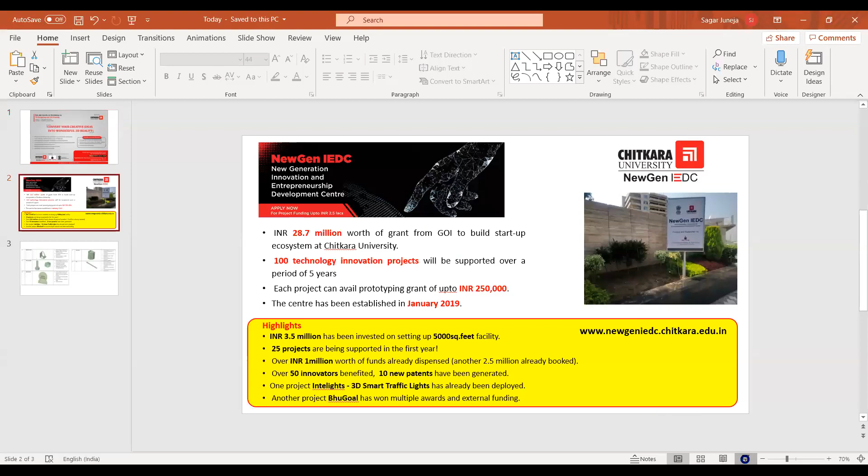So this is a quick slide on the center which I was talking about. It is called New Generation Innovation and Entrepreneurship Development Center, under which we have received a grant of 2.87 crore from Government of India to support these many projects.

So this is a center which is driving this particular workshop initiative. We have already supported 25 projects in this center. This center was given to us last year only, in January 2019. And a lot of our projects have won funding from different government agencies.

And then there are some projects which have won various competitions and all those things. So we are doing quite good as far as our center is concerned. If you are interested in more details, you can always visit this website and see for yourself what we are doing in the center.

Recently, during the lockdown period, I would like to share with you, we organized this competition called Innovate Plus, where we invited ideas from all over India for finding solutions to COVID-19 problems. And then we supported 4 of those projects from NewGen IEDC funding.

And we gave each one of them 2.5 lakh to build the solution. So we got these ideas from all over India. This is the kind of initiative we are driving in this particular center.

So as far as this workshop is concerned, these are the 5 different products, I would say, that we are going to learn to design in this workshop. All of them are practically usable products.

Like the first one is a mobile stand, then you have a nut and bolt, and the idea of including this nut bolt is that you should learn how to do threading and all kinds of things. And all other things you can easily relate that everything you are seeing here is of practical utility.

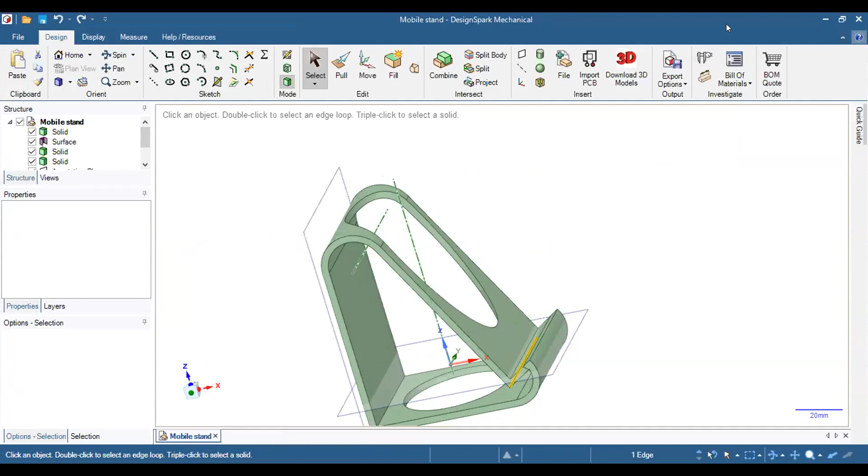How we can rotate this design by clicking, I have already told you. The spin action can be done by pressing the middle mouse button like this way, you can rotate your design in 360 degrees anywhere you want. If you are not comfortable with the middle mouse button, you can click in the orient section. You can see over here, by clicking the spin button, the spin command is on, and you have to click the left mouse button, and you can rotate it into 360 degrees.

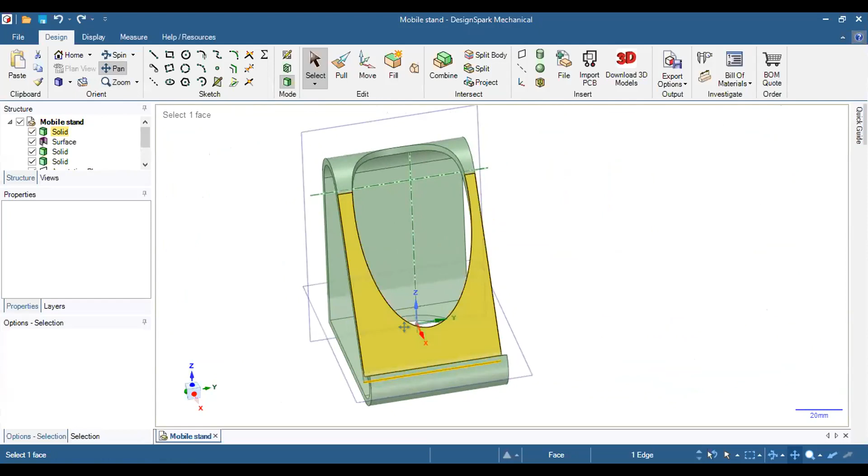Now the next one is the pan. If you want to move that object from here to here, like this way, you have to select that option and click the left mouse button, and you can move or pan this object into the screen. Once you are done with the panning, you can deselect this option by clicking into the blank environment, and the option will get disabled.

There's a different orientation views over here. These options only work when there is some design, like this one already designed, so you can see these options are enabled. The first one is the isometric view, you can see all three sides of the design in an isometric view. If you want to see a top view of the design, you can see the top view like this way. If you want to go to the bottom, there's a bottom view of the object that will appear, and same for left, right, front, back. You can rotate and see the specific view of your designed object in particular.

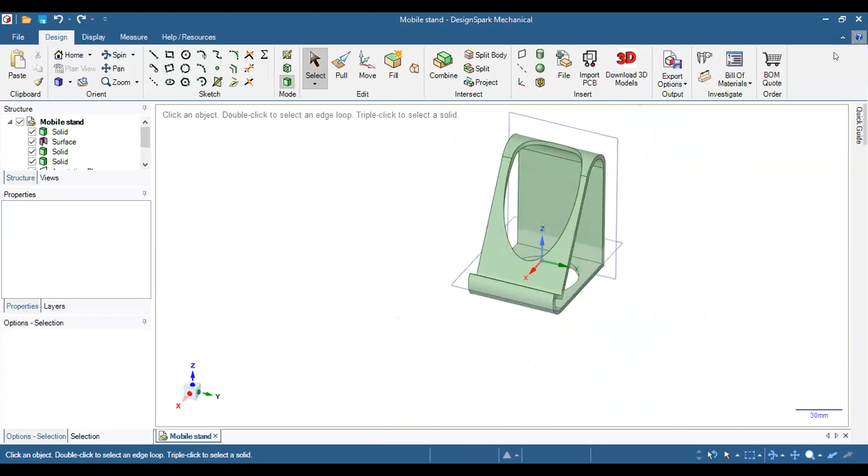Moving further, let me close this design because I just want to explain a few things in sketch and edit mode. I'm just closing this design like this way, clicking the cross on the page, going to the file menu, and inserting a new design. Once you have clicked on the design, you can see there's a design one page open, and see the working environment in the three coordinate system, Y, Z, and X system.

Once you have inserted the design, you have to rename it, and I must suggest that you must rename your design in order to keep things organized. This one is a test model. Test.

Once you have put the display name as a Test, you can see that it will be renamed automatically. So whatever you want to design, you have to design into this coordinate system.

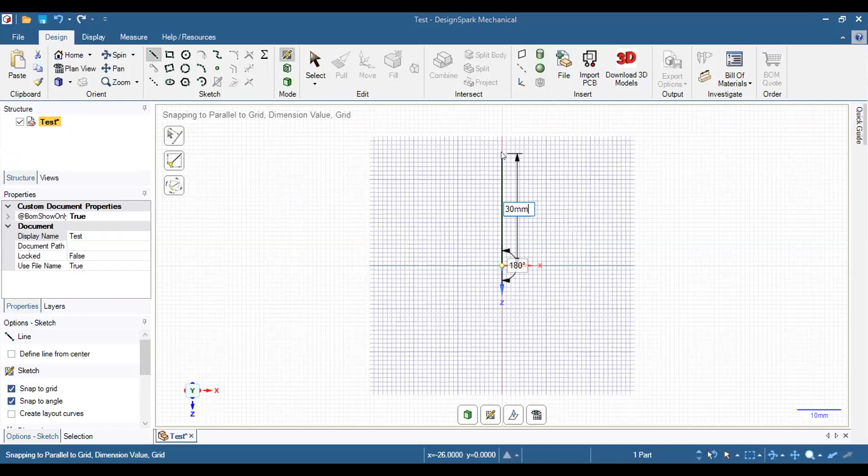Let us say it should be 30 mm. Once you fill your dimension into the box, you have to press the enter button, and you will see the dimension will be given. Because now the line is already selected, the next line will start from the same point.

Draw that line into the X direction, you can see another dialog box is opened, and you have to press again the spacebar, and put the dimension again for 30 mm, then enter. Same in this direction again, into the negative direction of the Z, and it's already showing 30 mm. If you want to put it again, you also can, otherwise you can press enter.

Now this sketch will be closed once this line connects to the start point of the first line, and once the dimension is filled, press enter. Now the rectangle, the square, has been completed by using line mode.

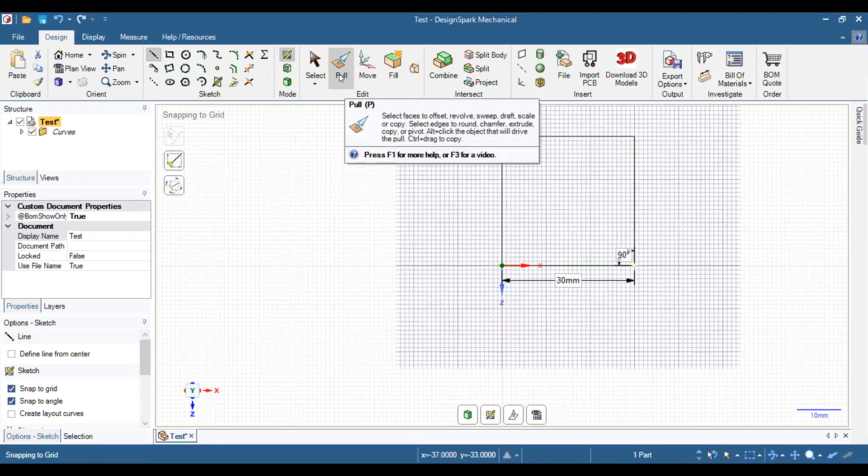Now that you've drawn the sketch and you are satisfied with it, you have to convert it into 3D mode. For 3D mode, you have to move into the edit mode, where you can see the pull command, which is used to convert any closed 2D sketch into 3D reality, like this way. Once you have clicked on the pull command, you can see that all the lines of the square have been converted into surfaces.

The square has been converted into the surfaces. You can also verify this from the structure menu. You can see the lines are converted into the surface.

In order to rotate, you have to click on the middle mouse button and rotate it 360 degrees, or you can directly click on the home button. You can see the surfaces will get maximized, zoomed into the screen.

In order to reduce that zoom, you can click right over here, or you can scroll the mouse scroll button. Scrolling downside, you can see the surface will get zoomed out; scrolling upside, you can see it will be zoomed in.

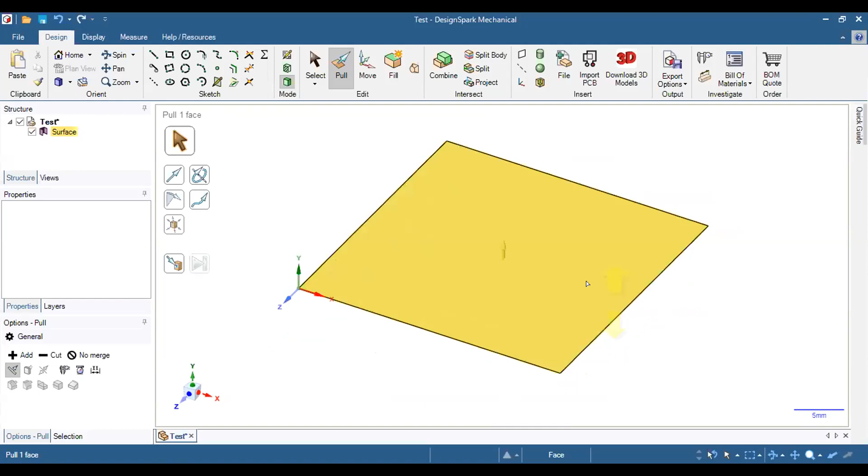Once it is maximized into the screen, or comfortable to you, you have to click on the surface by clicking the left mouse button, but make sure you have clicked on the pull command first. Once you see these two yellow arrows over the surface, you have to click the left mouse button.

Once you have clicked the left mouse button, you have to move your mouse into the up direction, or into the negative direction. If you are moving into the negative direction, you can see there is a subtract sign near the cursor. If you are moving into the positive direction, you can see there is a positive sign right below the cursor.

Once you see the dimension highlighted, you have to press the spacebar to freeze the highlighted dimension. Once it is frozen, you can release the left click of the mouse, and fill in the required dimension. Let us say it should be 30 mm again.

So this way you can convert the 2D sketch into the 3D reality. In order to pan, make it into the screen clearly visible. You can see it will be converted into the fully 3D.

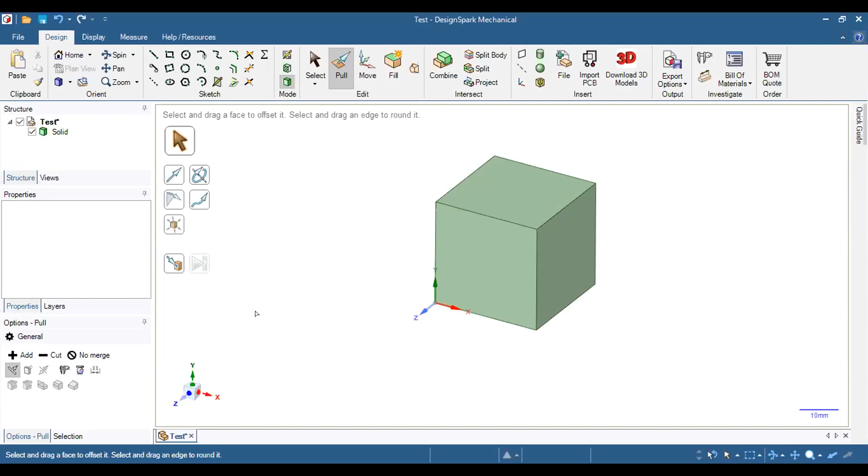Once you are done with this, let me delete this. I'm not saving this design right now. I'm going again, new design. You can see the default view is highlighted.

Again, I have put the test, renamed it as test, and click over a plan view to draw some sketch right here. I'm drawing a circle right here. You can see the circle will be drawn.

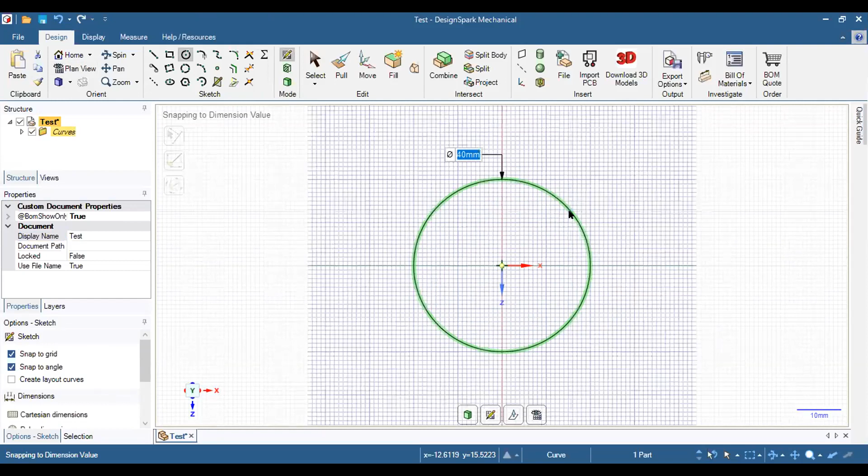In order to give a dimension, you have to press the spacebar button. Let us say the diameter of that circle would be 40 mm. Once the dimension is filled, you have to press the enter button.

Once the enter button is clicked, if you want to convert that circle into 3D, you have to click again onto the pull command. You can see the line will be converted into the surface, and again you have to pull it into the positive or into the negative direction.

Now you have to freeze the dimension by pressing the spacebar button. Now the dimension would be 25 mm. This way you can draw a cylindrical object.

But obviously you have to draw some sketch first. Only after that can you convert into 3D.

So now you can also see here's the intersection command and insert command, but we are not discussing all these commands right now. We will discuss them in the next session.

Now we are going to design our model, which is a mobile stand. In order to design that, you have to insert a new file.

Chanbi sir, can I interrupt for a minute? I want to talk about one particular command in this particular tool. I hope you can see in the insert command there is a command called import PCB, right? I want to talk about this.

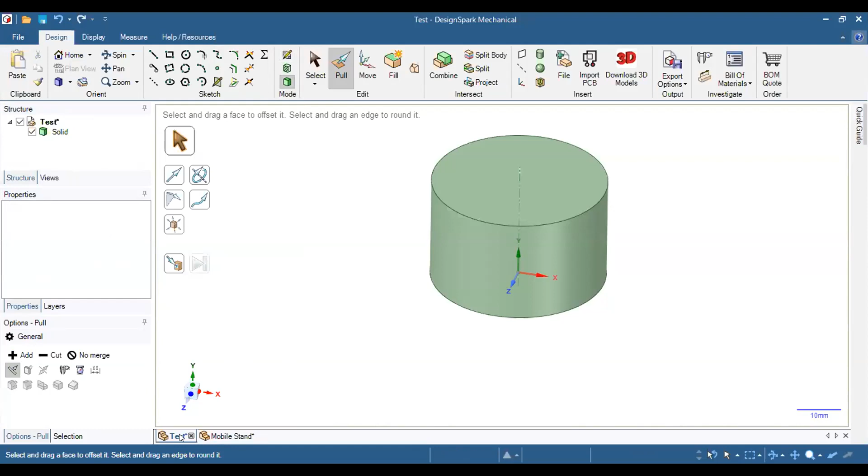I hope the picture of the design of the mobile stand is already available with you. In that design, you can see every design has 6 views. But what plane would you draw on the sketch mode to complete all the features in one command?

Like, if the left view of the mobile stand gives the maximum coverage of the mobile stand to complete the drawing in minimum commands, this way. Let me bring this plane into the plane view, like this, by clicking on a plan view.

Now I have to draw the mobile stand structure into this coordinate system by selecting a line command and start right from here. It should be 100 mm.

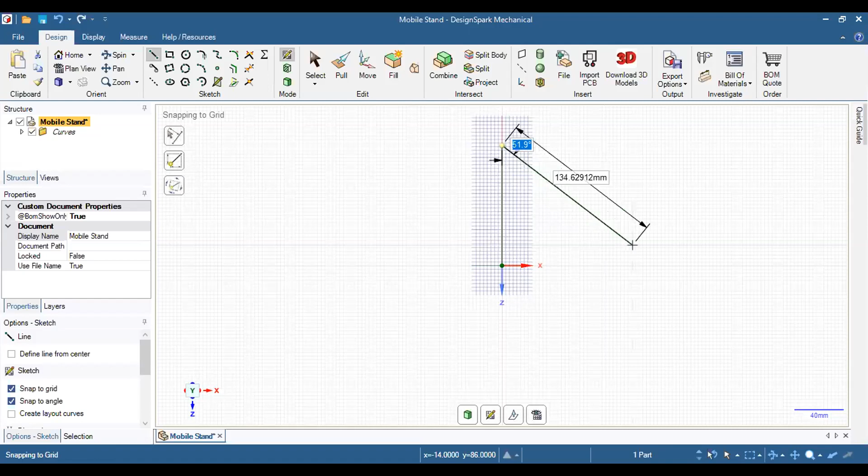So here the angle should be 45. Once you have filled that 45, you have to press enter. It will automatically select the angle of the previous line.

Now it should be... now the next line should be 20, or no, it should be 15 mm. Once you have filled that, you can see the next line will come here, which is obviously 92. You have to press the enter button and close this sketch.

This way, now the sketch is closed. You can zoom out by scrolling your mouse scroll.

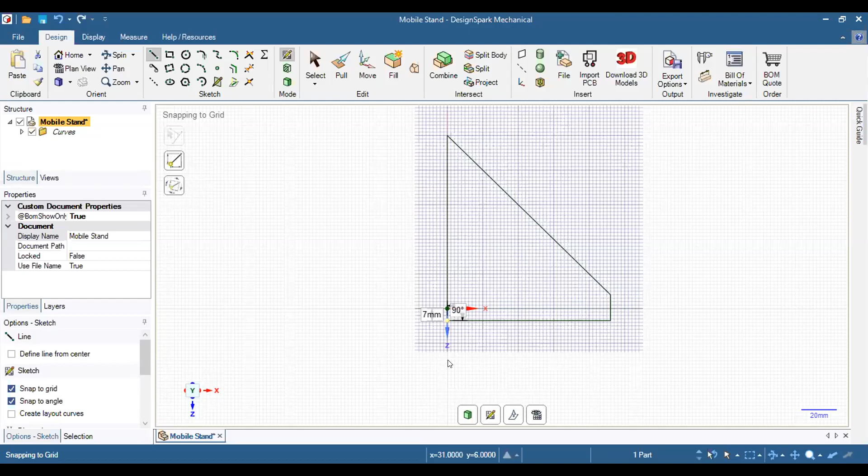So I'm going to repeat all this section again. Now I'm just undoing all the commands because I just want to repeat all the commands to let you be clear about what happened right here.

Once you have clicked on the line, you have to click at the center. Once you have clicked on the center, you have to fill the dimension. In order to fill the dimension, you have to press the space bar button, and the dimension will be frozen, and you have to fill the dimension.

Let us say it is 100 mm. Or you can directly put the 100. The default units will be automatically selected, which I have already defined, which is mm. So now press enter.

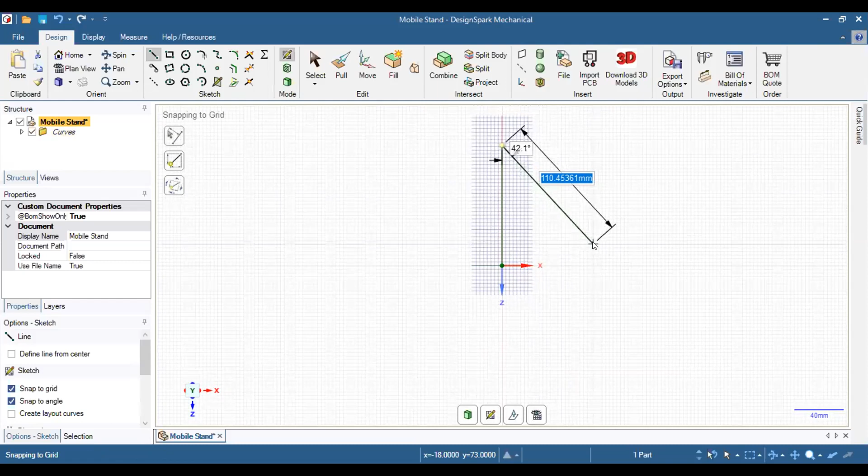Now once it is done, the line will be drawn, you can see the another line. So here you can see if I'm moving this line into some angle, you can see there is a second constraint that will appear right above the line.

You can see, in order to switch the dimension, you have to press the tab button. By pressing the tab button, you can switch between the constraints. Now we are in the constraint, which is the angle constraint of the line. To constrain it, you have to fill the required angle, which is 45, and press the tab button.

Now you have to fill the line length. You have to put, let us say it should be 120, I guess. Yeah, 120 would be fine, I think. Now once you have filled the dimension, you have to press the enter button. The line will be drawn.

This way you can draw any line into the angle. So I'm going to draw the next line. It should be... it should close right here.

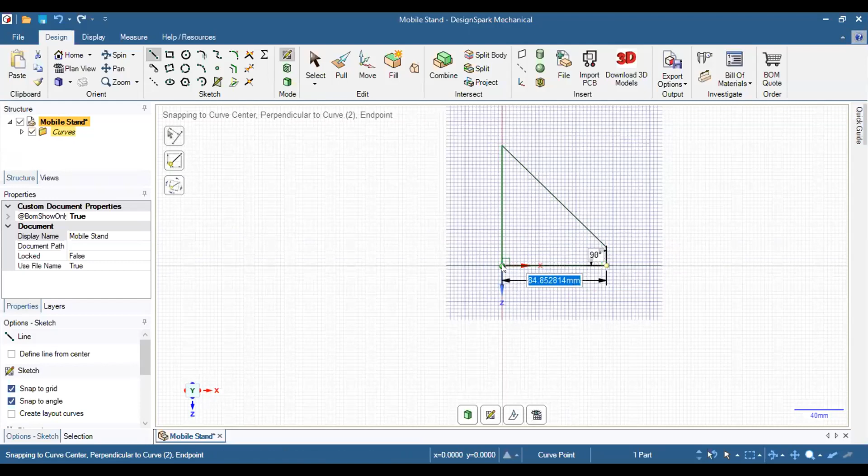So once I am dragging or moving my mouse to the next line, you can see the previous line will be highlighted as green, which shows that the sketch will be closed.

Once I click right here, the closed loop of the curves will be drawn into the coordinate system. You can also verify this from the structure section, or you can expand here to see all lines. By selecting here, the selected line will be highlighted in green, or you can select multiple lines by pressing the control button. All lines will be selected and highlighted in green. If you want to deselect, you can simply deselect.

Once you are done with the sketch and it meets your requirement, you have to convert it into the solid. In order to convert it into the solid, you have to select the 3D mode, which is here, or you can directly click on the pull command. Once you click on the pull command, the sketch feature will turn off and the 3D mode will automatically be selected. From the structure section, you can see all curves are converted into a surface, visible in the environment. You can verify this from here.

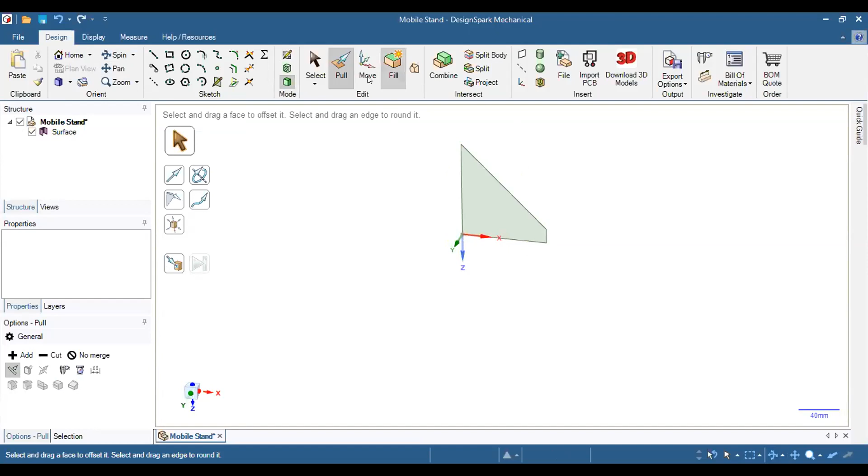Now you can spin by using this, or you can click on the home button. It depends on you how you want to rotate this surface into the workspace. Once you are done with this, you have to convert it into the 3D. Now, this way, I click the left mouse button and move it into the positive direction.

The width of the mobile stand should be, let's say, 60 mm. In order to fill the dimension of 60 mm, you have to freeze the highlighted dimension by pressing the spacebar button. You can see the dimension will be frozen. Now you have to fill in the dimension. 60 mm is enough. You can see the width of the mobile is pretty close to 70 mm, and 60 mm would be fine.

You can see the 5 mm margin from the left or right side of the mobile once you place it over the stand. Once you are done with the dimension, you have to press the enter button, and you can see the dimension will be given. I think the dimension will be wrong right here. Let me verify first. Now it should be 60. Yeah.

In order to move into the up direction, you can click over the pan and move it into the required area. So here you can see the basic structure of the mobile stand. In order to make here a stand, here a support for the mobile, you can see the back side of the mobile is placed right over here, and the bottom side of the mobile rests over this plane. But you can see the bottom side of the mobile does not rest like this way.

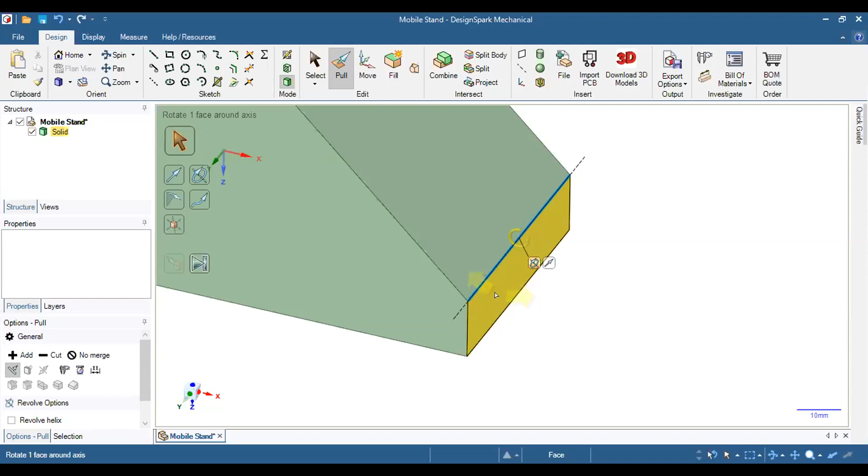Now you can see two yellow icons appear, yellow cursor arrows appear on the respective plane. If I move my mouse into this plane, you can revolve this plane or either this plane. But to rest my mobile into this stand, you have to revolve this plane. In order to revolve this plane, you have to move your cursor into this plane, and by clicking the left mouse button, you can revolve this plane into the required angle.

In order to freeze this angle, you have to press the spacebar button. Now the dimension is frozen. I'm zooming it out. Let me see. Okay, once the dimension is frozen, you cannot orient your design, but you have to fill in the required angle into it. It should be 125, I think that should be enough.

Yeah, that's fine. So this way, the back side of the mobile rests over here, and the bottom side of the mobile rests, so it rests over this plate. I'm now zooming out this. Sorry, I'm creating an isometric view, and now revolving it.

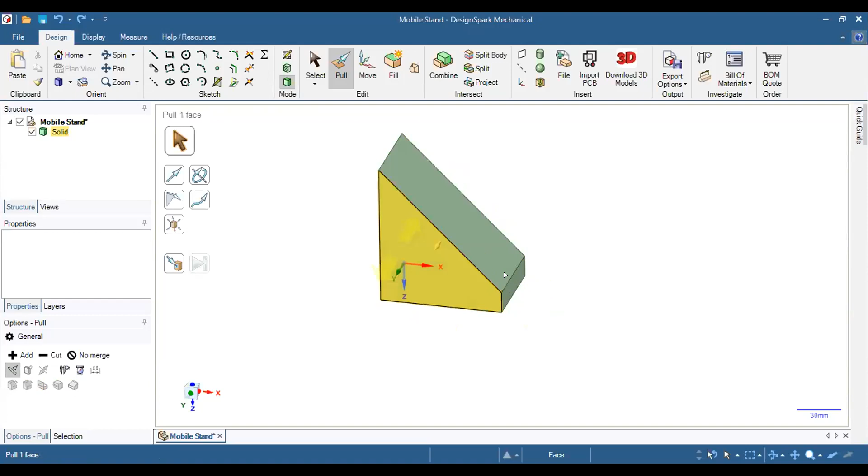In order to revolve this plane, you have to click on the revolve command. Once the revolve command is selected, you have to select the axis first, in which axis the plane will revolve. So the axis would be this in this case. I'm selecting this axis. Once the axis is selected, you can see it will be highlighted as a blue color, sky blue color.

Now it's asking for the plane to revolve it around this axis. So in order to revolve this plane, you have to click on the required plane with the left mouse button and drag your mouse into the positive side, or you can rotate this way, but it is not required this way. So I'm revolving it this way.

Now the dimension will be highlighted, and press the space bar button. You can put your required angle. In this case, I put 125 degrees. The degree will automatically select; you don't have to put the degree sign here. Just press enter.

Once enter is pressed, the dimension is totally frozen. You cannot edit the dimension. But if you want to change the angle, you have to undo it and repeat that command, like we have done right now.

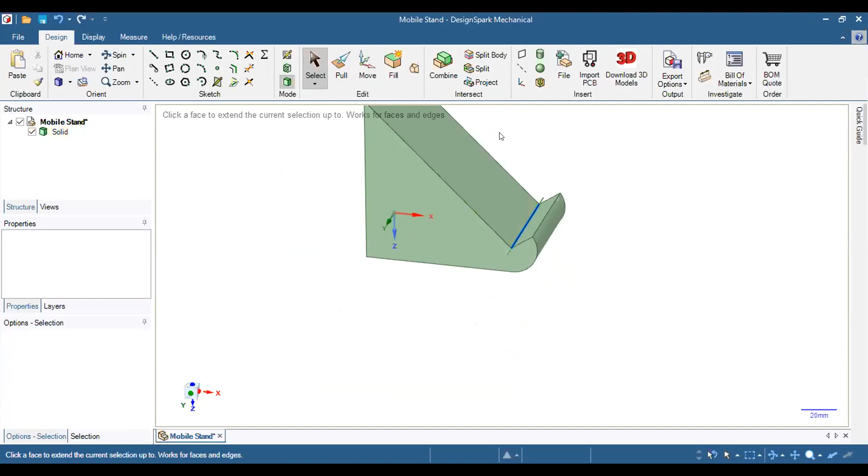So now I'm zooming out and moving this object into the screen.

I got one query about the pull command. Somebody, it seems, is stuck at the pull command only. So how quickly can you show it in a different design? I suggest you can have one test screen, maybe one new file, where you can quickly show this pull command. Actually the participant, I think, is stuck with the pull command, like how to extrude. He's stuck at the plan view. He's fine with the plan view, but he's not been able to pull it. So maybe you can show the pull command. I think he's stuck in the plan view.

I hope he draws some sketch into the plan view like this way. I hope you are in this situation. After this, you explain what to do, maybe little step by step. Okay, sure.

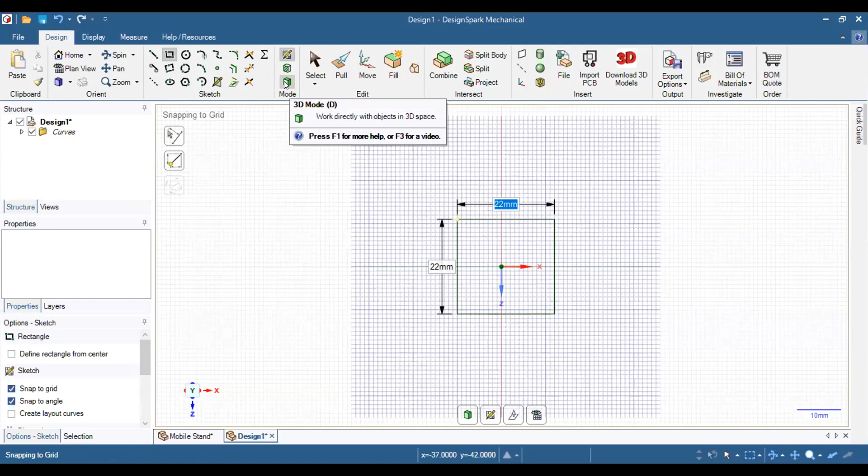Right now, I hope you are seeing this option is on. In order to disable this option, you have to move into the pull command. You simply select this command, or you can left click onto the 3D mode option. Once I click onto the 3D mode option with the left mouse button, you see the plan view will be disabled this way, and the pull command is automatically selected, and the lines you have drawn are converted into surfaces.

But make sure your drawn sketch is closely joined together. Let me explain one more time. In plan view, like you are drawing some sketch this way, I'm randomly drawing anything, so I'm not closing these lines.

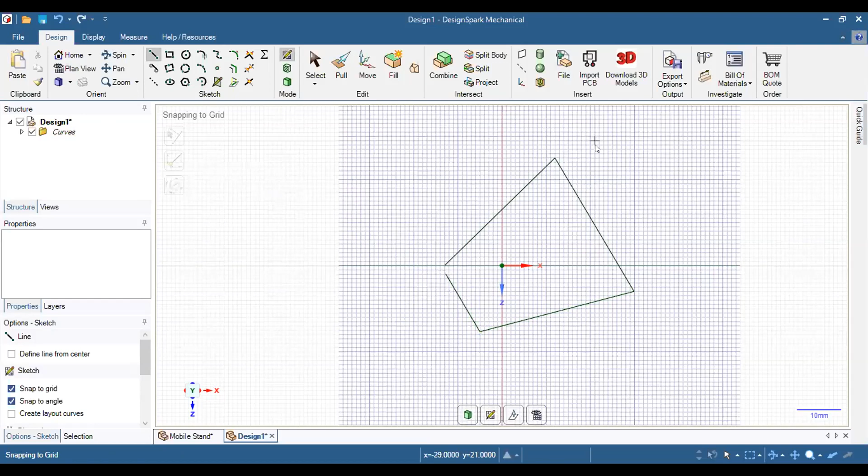And you have clicked on the 3D mode. You see the curves will not be converted into surfaces. However, you can select the pull command or go into 3D mode, but you cannot convert your design into the 3D shape, because the drawn sketch is not closely looped.

It must be closed from this end to this end. So make sure your sketch is closely looped with the lines, whatever you have drawn, or if you've drawn a circle — obviously a circle is already closed together — but if you have a semicircle, you have to close it.

This way you have drawn the circle. Now you are going to use the pull command. You see the circle is closely looped, and you can convert it into the 3D shape.

I hope you understand how you are changing the angle of the views by clicking the middle mouse button. By holding the middle mouse button, you can rotate any object through 360 degrees. But if you are not comfortable with the middle mouse button, you can click the spin option here, and by clicking the left mouse button, you can revolve any object through 360 degrees.

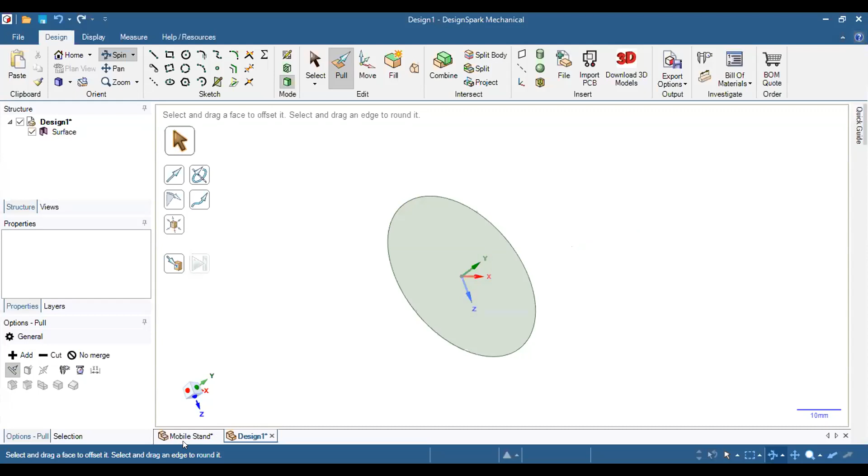Okay, thank you sir. So we are into the mobile stand design. Once you are done with the revolve command, you have to remove the extra material from this design, because if you are going to print this design, it would take nearly 10 to 12 hours for this particular volume.

But if you want to reduce the time, you have to remove the extra material from this object, because the inside material is not necessary for keeping the mobile right on this mobile stand. So in order to remove the extra material, or add new features into this solid, you have to select any particular plane of the solid of the mobile stand, I should say.

Now I'm going to remove some extra material from this section in this way. But in order to do this, you have to select a plane, either this side or this side. I have already selected this side of the solid.

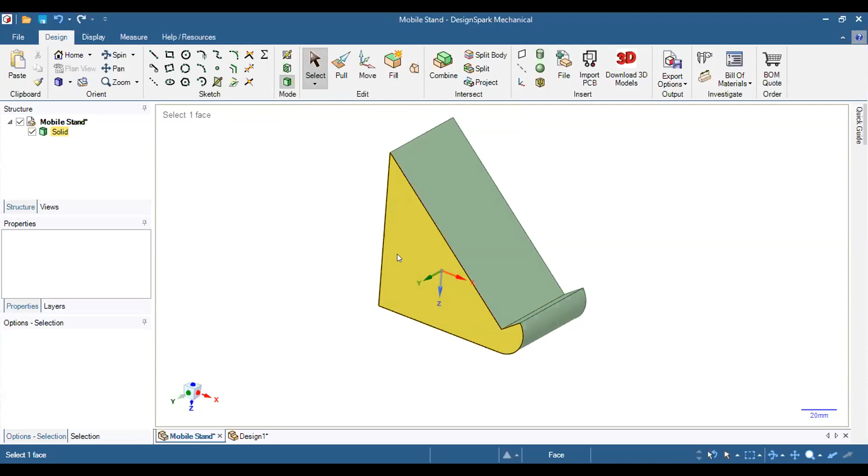Once you are in the select mode, you have to select the required plane where you are going to draw your sketch for the next feature. So now I have selected this plane of the solid. Once selected, you have to click on the plane view in order to go into the sketch mode.

Now I've clicked over the plane view, so right now I have a plane view. The selected surface is parallel to the screen, but the sketch feature is not yet selected. So in order to do a sketch, you have to click on the sketch mode by clicking the left mouse button. Once clicked, you can see the grid right here on this plane.

Right now, as mentioned, we are covering the offset command in this mobile stand design. In order to offset, there should be a line which is previously drawn. You can see these lines which are highlighted by the environment in the sketch mode. In order to offset these lines in the plane view, you have to click the offset command.

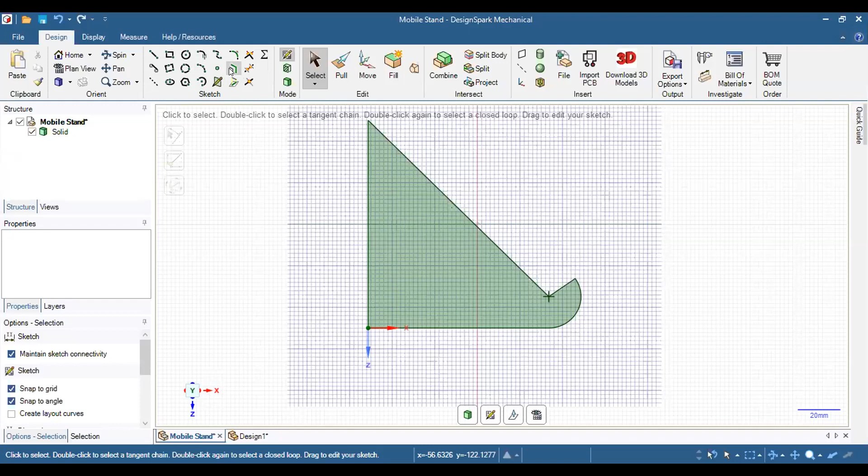In order to select the offset command, you have to move into the sketch mode, go into the sketch tool, and right here you can see the offset curve. So in order to offset, you have to select this command.

Now I'm moving, the command is selected. I'm moving my mouse over this line. I just want to offset this line, so in order to offset it, you have to click the left mouse button on this line. You see, you have to move the mouse if you want to offset this line into this direction or into this direction.

But I just want to remove the inside material from this solid, so I'm offsetting this line toward the inside direction. And in order to freeze the dimension, you have to repeat the same, pressing the space bar button.

You see the dimension will be highlighted, and the minimum thickness for this line should be 3 mm. You can see now the line is drawn, offset 3 mm away from this side.

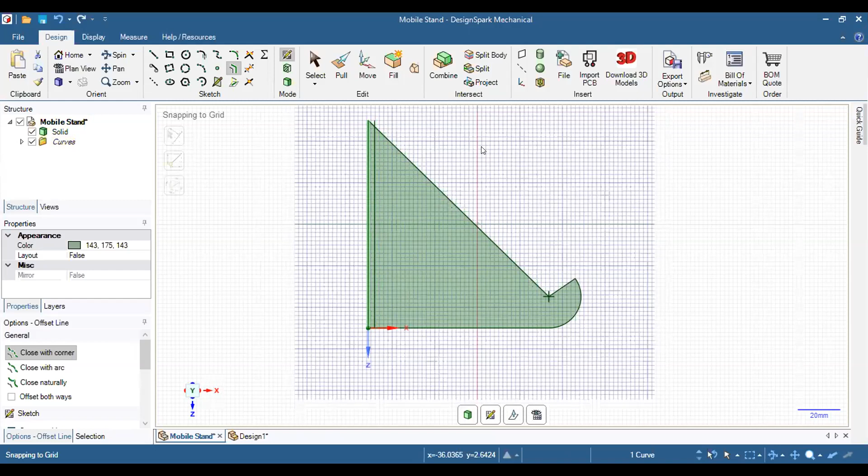So I'm repeating this line. You can see all the lines. We need to offset all the lines this way. In order to freeze this dimension, you have to fill in the dimension. It should be 3 mm. Now again, this line should be 3 mm away from this line. It should be 3 mm. Again, this curvature should be 3 mm away. It should be 3 mm.

Why are we doing this offset? Can you explain? The offset command is used to select a previously drawn feature, and these features are converted into the sketch mode, into the sketch feature.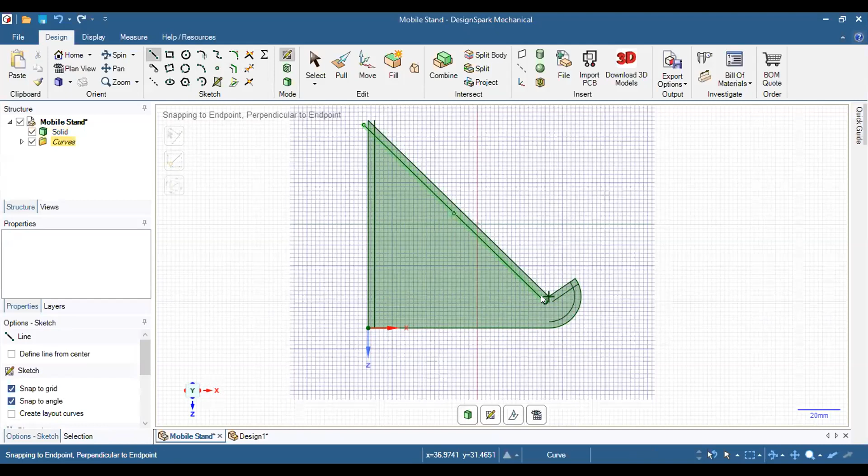For this line, I could also draw a new line, but instead I have to fill in the diameter of this curvature again, and put the dimension of this line, the length of the line. Basically, you're copying and pasting the line. That is what you're doing, right? Yeah, the offset command is typically for that, copy and paste, for this line.

Like, I'm selecting this line, and the line will be copied in this direction or in that direction. Now I'm moving my mouse into this direction. It is highlighted as 3 mm, and I press enter. You can see all the lines are drawn, all copied from this solid to this sketch feature.

Once you see all the lines are drawn, this line is not joined together. In order to work in 3D mode, you have to close all the lines, or join all the lines together. So in order to join these two lines, you have to combine them. Here should be a corner feature.

In order to join these two ends of the line, but before that, you have to select this command by clicking the left mouse button. Once you've selected this command, you have to click on the end of this line. It should be - no.

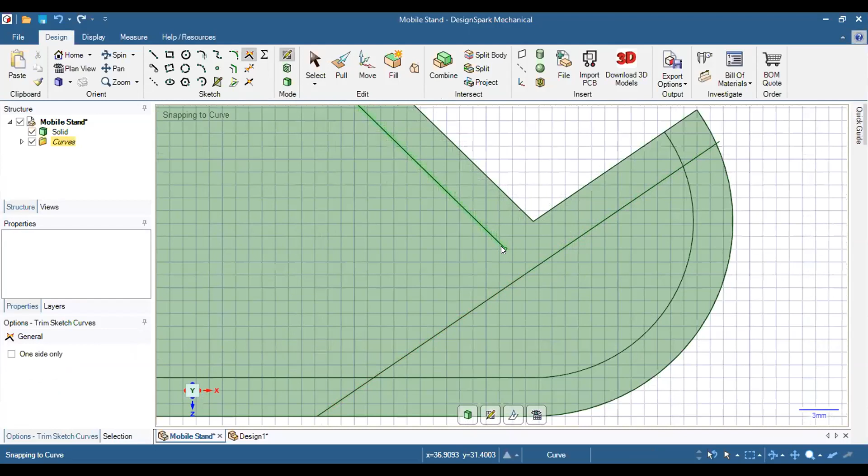Now again, I'm undoing this. The command is selected, and you click this end or this end. So I'm repeating this again. I'm undoing this by Control Z, or you can click right over here to undo or redo. You can see - oh, sorry.

So in order to join these two lines, you have to zoom in. Once the command is selected, you click on the line end. Once the line end is selected, you move on to the other line end which you want to join together. So once you've done that, you move your mouse onto the other line, and you see the edge will appear as a joint. Once I left-click the mouse on the second line, you can see the lines will be joined together. So you can see here, as an extra, the line which crosses this curvature.

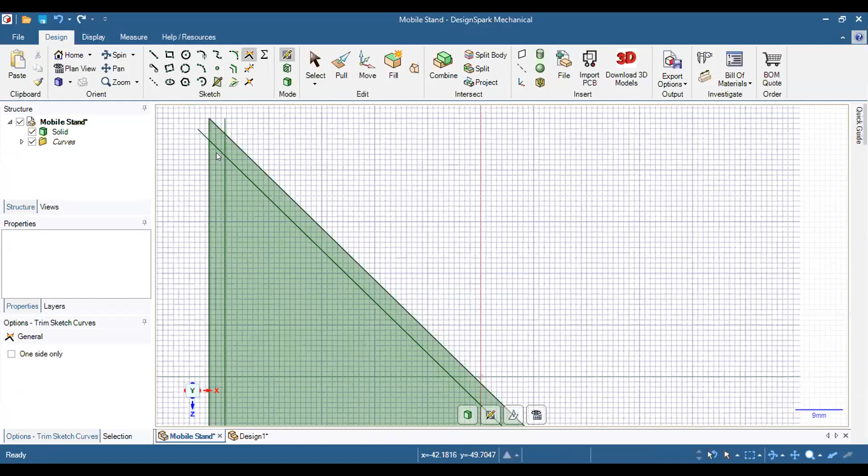Here you can see this line crosses each other. So in order to remove this line, you have to use the trim command, or the pull command, to remove this extra material from the solid. You need a closed loop.

Now the sketch is mostly closed loop, but here are some lines which are open from the other end. From here it is closed, but it is open from the other end. In order to remove the unwanted lines, you have to select the trim away command. You can see here it is highlighted as the trim away command. To remove this line, select it by clicking the left mouse button.

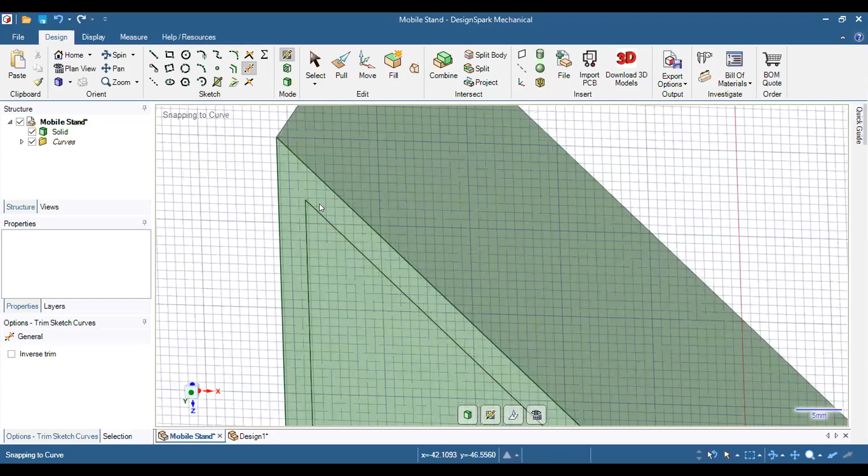So now I'm moving my mouse over the line which I want to remove from the sketch. You can see it will be highlighted in red color. By left-clicking over the line, it will be deleted automatically, like this way. I just want to remove this line also. I'm zooming out. I also want to remove this line, and this line. Same from here, or here, you can see there is a little line highlighted right here - you have to delete this also.

Make sure you've deleted all the lines which are crossed over each other, or have an open end from the other side, or another end of the sketch. Once you are done with this...

I received a query about joining the two open ends, the corner command. Can you please repeat that separately? Sure, sure, sir. I request the participants - I'm sure these queries are coming because you are trying to do it yourself in the live session, which is highly encouraged, but it will be a little difficult because you may miss a couple of points here and there. So we are going to share this video with you anyway, so you can always go back to it. Anyway, Chalpi sir, can you please repeat that corner command? Sure, sure, sir, I'll repeat it here.

Okay, so I think the situation comes, you know, I hope you are in this situation. You want to join these two ends of the line.

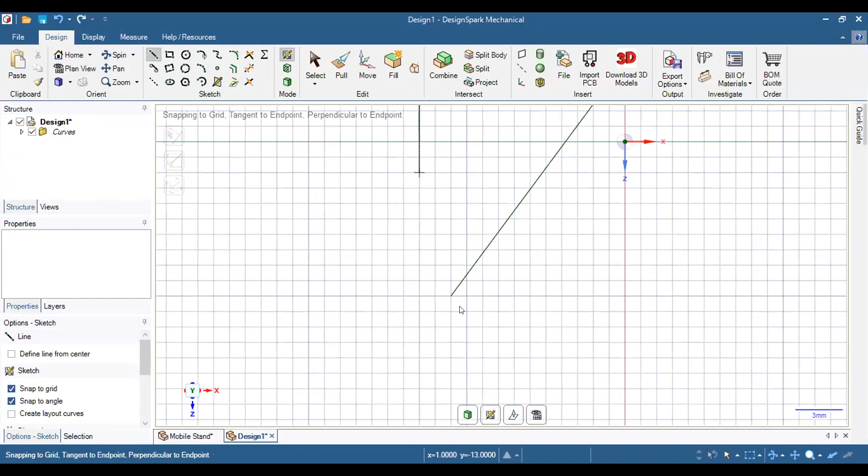In order to join these lines, you have to select the corner command right over here in the sketch menu. Once you have selected this, you have to click on the line end. Whether you select this line first or this line first doesn't matter, but you have to select the line end precisely.

Once you click over here, you just want to join this with this line. You have to move your cursor to this line and click the left mouse button. You see the line will be joined automatically. I hope the query is clear to you.

Yeah, I think it must be clear now. Yeah.

So now I'm moving to the previously designed mobile stand. I'm zooming out. So all the drawn sketches are converted into closed loops. So I'm moving into the 3D mode by selecting it.

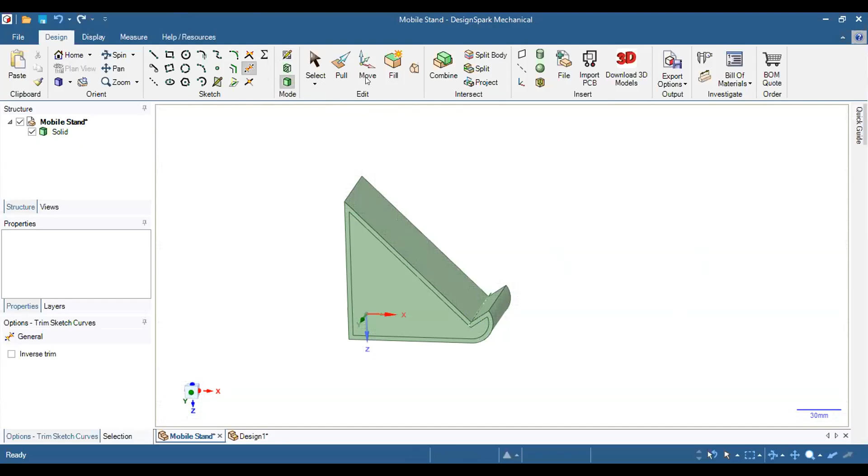I'm right now in the 3D mode, but the pull command is off. In order to remove this surface from the solid, you have to select the pull command. The pull command basically lets you convert any sketch into 3D, or you can use it to remove extra solid from the previously drawn solid.

As I move my mouse, you can see both planes are selected, this plane or this plane, but I just want to remove the inside material from the solid. So be specific about what you are going to do in the design or solid, or what feature you are going to apply in the mobile stand.

So in order to remove this inside material, I'm moving my mouse onto this plane, and you see two yellow arrows appear. Once they appear, you click the left mouse button, then drag the mouse into the Y direction.

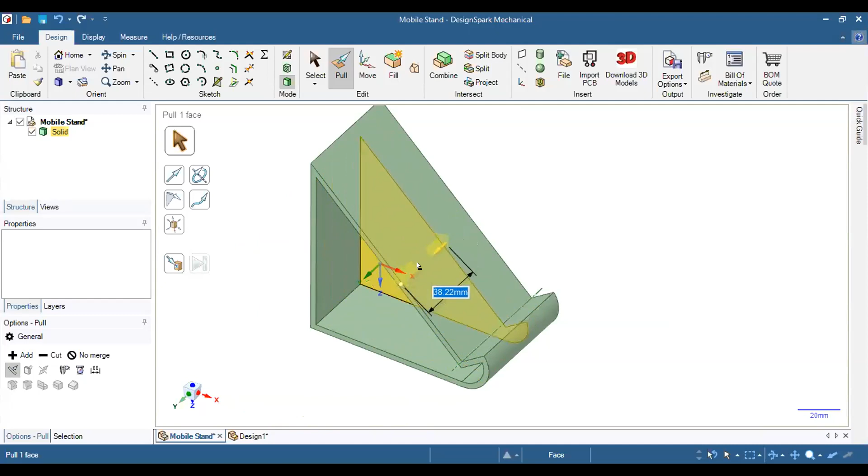You can see it is a Y direction. Once I'm moving it into the negative direction, there's a negative sign right below the cursor, so the material will be removed from the solid.

I'm not filling a dimension right here because I know it should be, let's say, 90, or whatever the default is. I'm pressing the enter button. The material will be removed.

This way you can remove any material from the solid. But I'm undoing it. If you want to add this plane into the solid, you have to move it into the positive direction. This way you can extend the design, but it will be extended from this plane only, not the entire body.

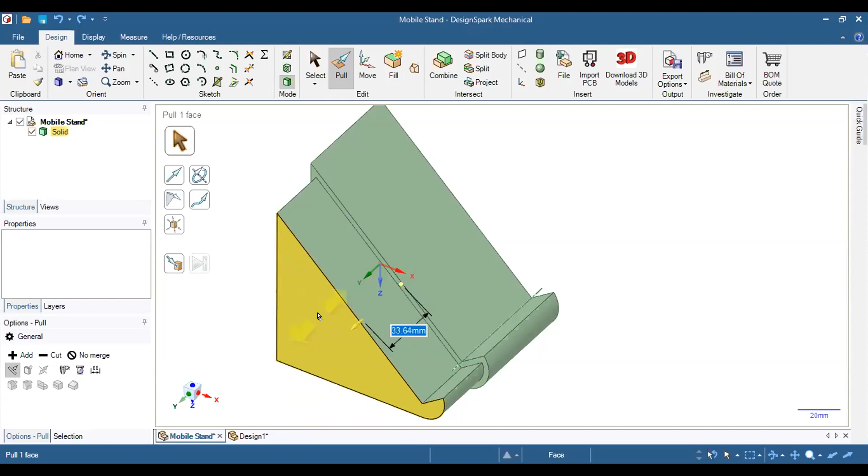So be specific. This way I'm doing it again, so all the material is removed from the internal side.

From here you can see the mobile will be placed, back side of the place here, and the bottom side of the mobile is placed right here. So it is typically fine, but to make it more realistic, or make more...

A couple of things I want to add here, and I want to ask one question to you also. For the benefit of the participants, since I am also an outsider, from that outsider point of view, I want to summarize whatever you have just told.

So if we need to remove or add any material in a particular distance from the outer boundary, we need to go into the sketch and make the boundary on the plane, and then anything we are doing in 3D, we need to go into the pull command. Is my understanding correct? Yes, sir, correct. So anything we are drawing, we go in the sketch, and anything in 3D, we go in the pull command. Right. Is that right? Yes, fine, sir.

Okay, now I have a question for you. You're working on professional CAD tools also, like SolidWorks and CATIA, and you're also working on this rapid prototyping tool. Again, I am not saying this from a comparison point of view, because I understand those are professional tools and this is just rapid prototyping. But how easy is it to remove material in that professional tool? Like here it is quite easy, right? I mean, you just draw and then pull it.

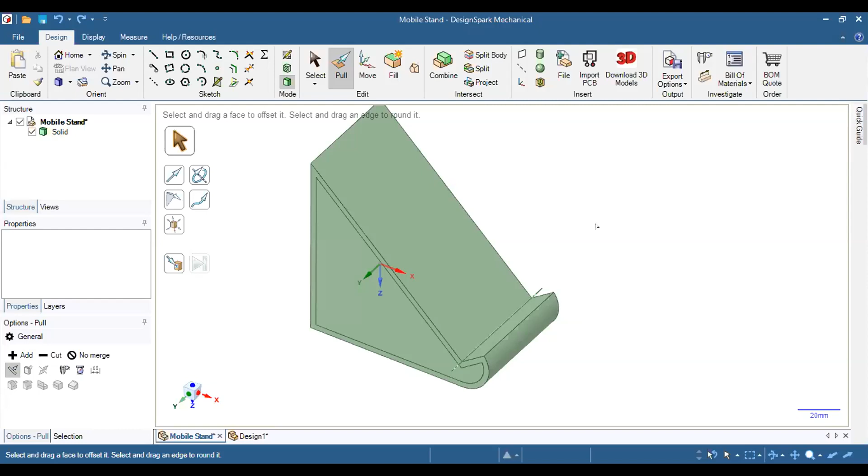I'm doing this command - should I draw the sketch again? No, you don't have to draw it. You can simply, after making a complete sketch inside, just show how to remove it. Okay, yes, you can start from here.

So from here, you can see you have to offset the other lines as well. You can see the curvature of this line you want to add in this direction. You have to click on the line, and once clicked, fill the dimension by pressing the space bar button, and the dimension will be frozen, and the required dimension you can put from your keyboard. Once it is filled, you have to press enter.

Now you have to offset this line too. The command is already selected, you just have to select this line. I want to offset this line into this direction. In order to freeze this dimension, press the space bar button, and the dimension will be placed, then fill the required dimension. Once it is filled, press the enter button.

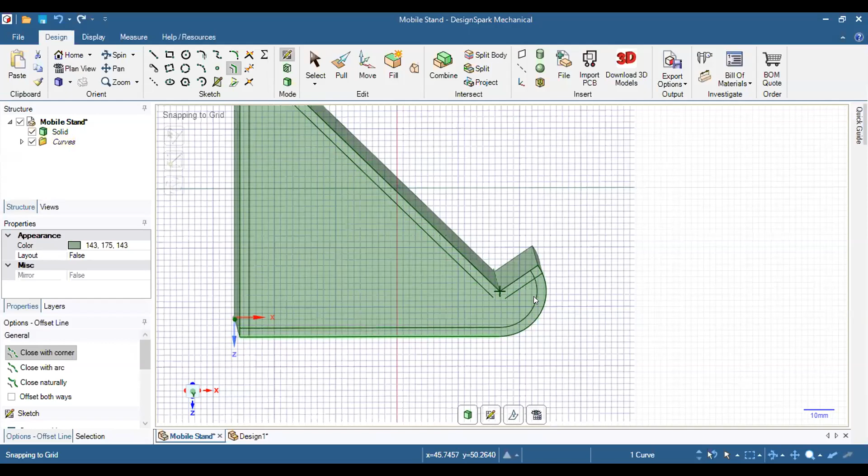You can see all the lines are drawn, but some lines cross each other, or some are left unjoined. So let me first join these two open ends of the lines. In order to join these lines, I have to select the corner command in the sketch tools, by clicking the left mouse button. Once you have selected this, you have to zoom in.

Let me zoom in more this way. There's some issue with it, let me check it. I'm clicking on home view, now again in the plan view. So from here, I just want to join these two corners. Why is it connecting to the other end?

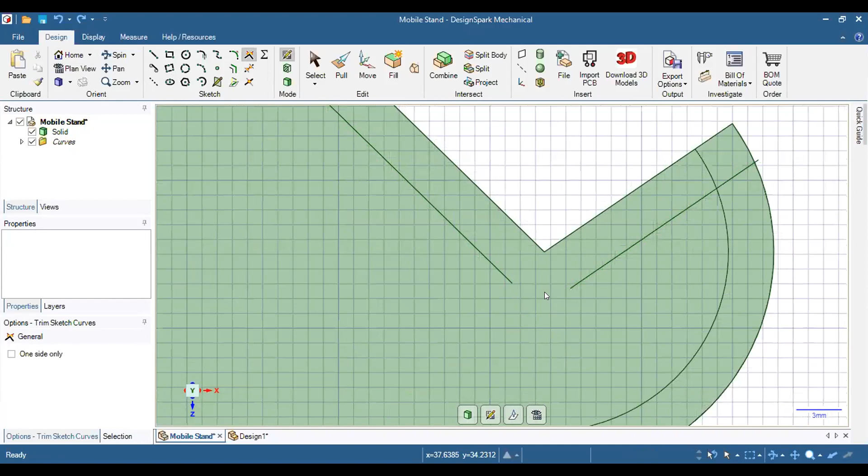I think there is some bug. Why is it connecting? Okay, let me delete this line first by selecting it.

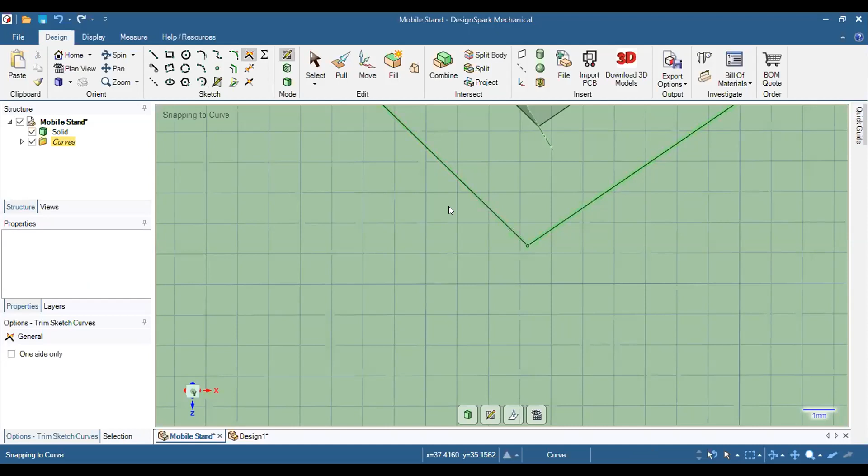Okay, now I'm just going to join these two ends of the lines, but you have to make sure the line is selected - the end of the line should be selected this way, and you have to select another end of the second line. Once you have selected this, you see the corner will be joined together in the same direction, so the direction won't change. You can see the projection of this line going this way, and the projection of this line going this way, and they will meet at this end and make a corner right over here. So once you are done with this - before that I had deleted this curvature, I think it may be creating some issues in making a corner right over here.

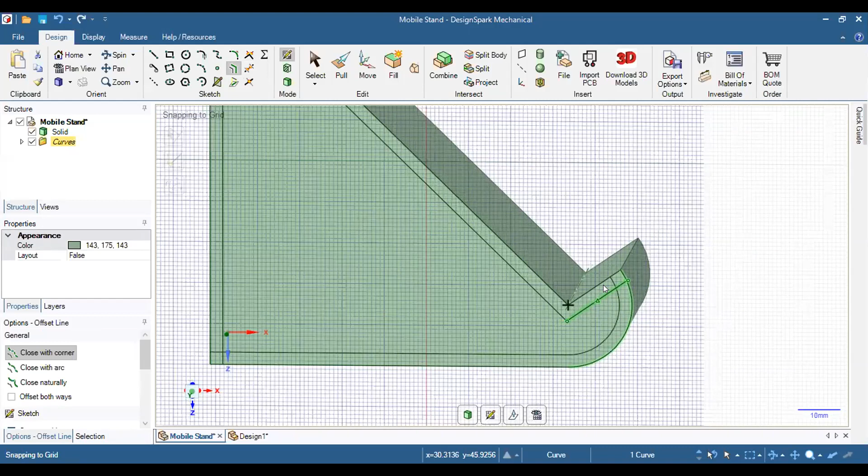So now I'm just offsetting this curvature again using the same method. You have to press 3mm and press the enter button. Now you can see all the lines are joined together, but you can see some extended lines crossing each other.

In order to make it a perfect loop, you have to delete the unwanted lines. You have to go to the trim away command to delete the unwanted lines. You have to zoom in on the solid to make a precise removal of the unwanted line. You can see there are some other lines - I'm zooming in or out by scrolling the mouse middle scroll button.

So I also want to remove these unwanted lines. Okay.

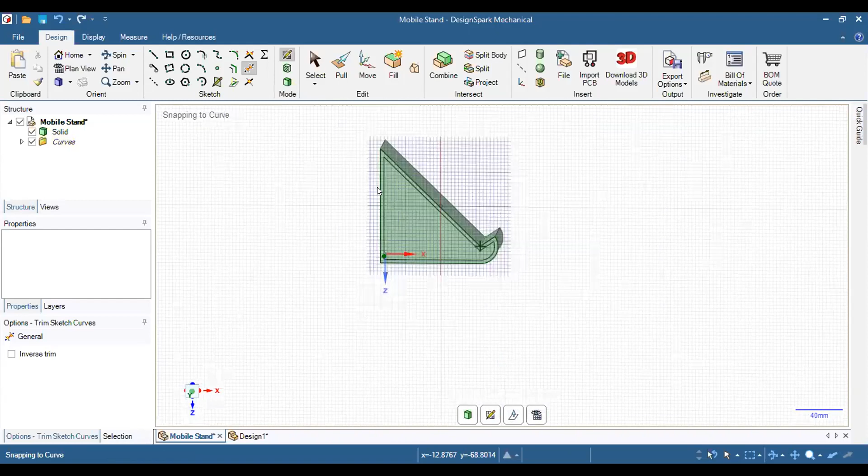I hope this is clear to everyone how we can draw some sketch onto the previously available solid in the environment. So once you are done with the sketch feature, or if it's your requirement, you have to move into the 3D mode. Once you are into the 3D mode, you can see the sketch will appear like this way.

You have to select the pull command in order to remove this unwanted material from the mobile stand. In order to remove this material, you have to move your cursor onto the specific plane, click the left mouse button, and move into the negative direction. So once the material is removed, you can see there is some hollow space, a hollow mobile stand. It will appear completely hollow from the inside.

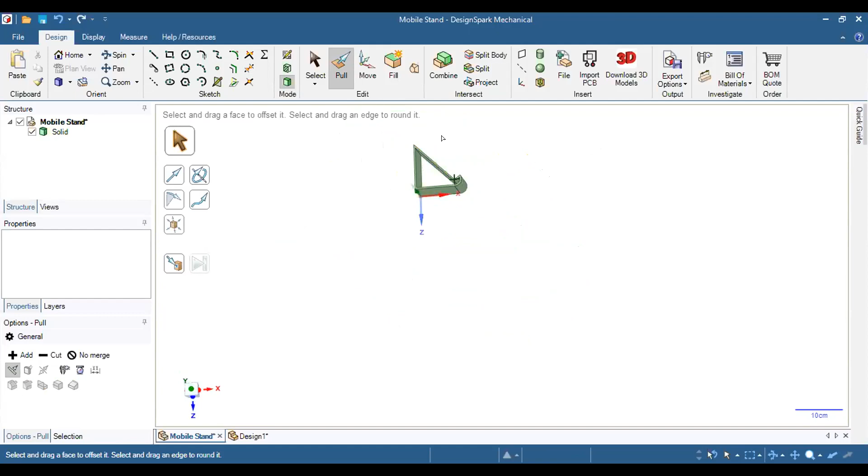So in order to apply the dress up feature, moving further, we are going to apply the dress up feature right here. To apply a dress up feature, you should make sure you are in the pull command. The dress up features are only available in the pull command. You can see here are some features which are highlighted in the option. I hope you are seeing these commands in the general setting right below the options. These options will only be available when you have selected some line or some plane in the solid.

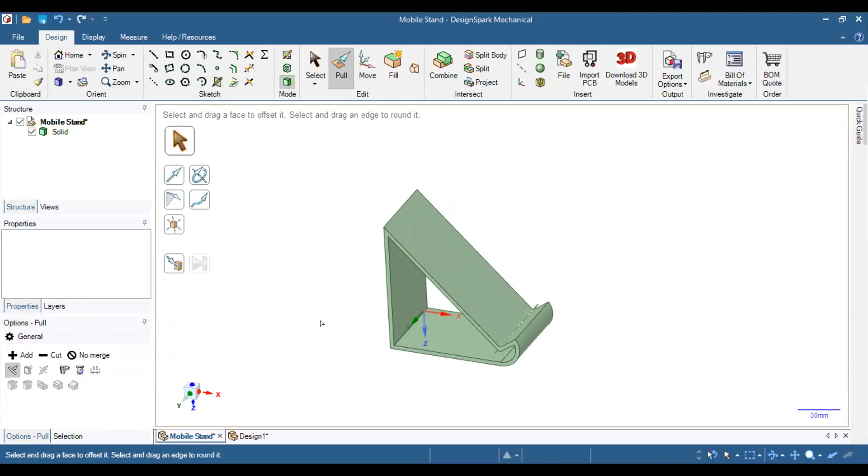Let me explain these commands: first is round edge, then fillet, then wall, you can extrude some edges from the solid, and so on. Let me tell you the very first command in the general settings. In order to turn this option on, you have to select this edge. First, I'm going to select the inside edge of the mobile stand, like this way. You can see all the features are available right now.

Once the first command is selected, if the yellow arrow appears, you can see there is a yellow arrow right above the line. In order to make it round, you have to pull in this direction. You can see there is a dimension which keeps changing by dragging the mouse upside or downside. In order to give a specific dimension, you have to press the spacebar button. Now the dimension is highlighted, or I should say frozen right now. You have to press the backspace key. Now the round curvature of this corner, let us say, should be 12 mm. This way you can see the corner to the edge is applied using the round command.

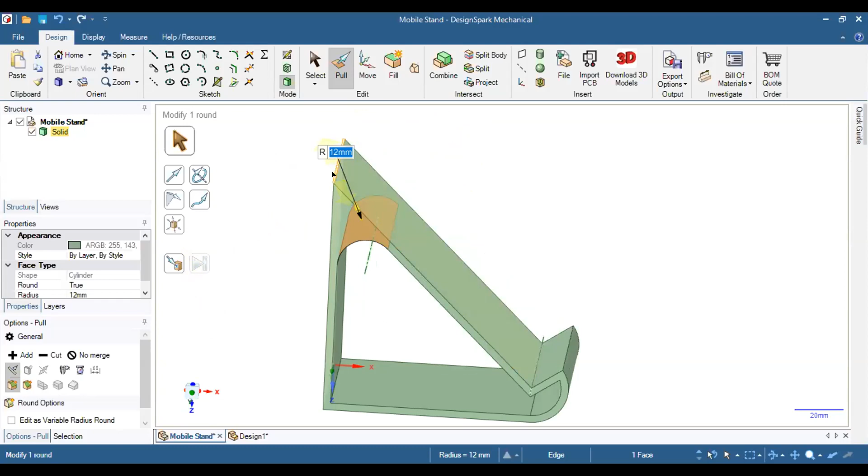This command is only available when you have selected the line, but before that, obviously, you have to go into the pull command first. So in order to make another edge round, you have to select the other corner, which is this one. I'm moving or dragging my mouse into the required area. You see it is closely fitting, and once it is perfect right now, I think it should be 15 mm.

It appears. If you try to cross this previously rounded corner, you are not able to, because there is already some constraint on the previously rounded corner. You can go maximum from corner to this curvature. So in order to fill the required dimension, you have to press the spacebar button. The dimension will be highlighted, and you have to put in 15 mm. So you can see the round corner is applied to both sharp ends of the mobile stand. This way you can apply the round feature to any sharp corners.

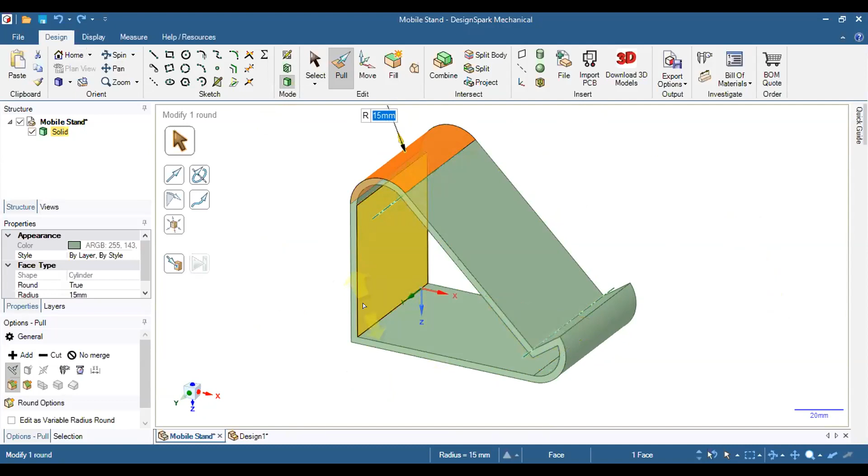So from here, we are done with this, but you can see here is some extra material right here, right at the bottom. So you can also remove this material, but you have to again draw a sketch onto the specific plane from where you want to remove the unwanted material. So I'm doing another sketch onto this plane.

Make sure you are going into the sketch by selecting the select command, and you have to select the specific plane where you want to draw a sketch in order to remove unwanted material or add some material to the body. Once you have selected, you have to click on the sketch mode. Now you have entered the sketch mode. You have to click on the plane view in order to get maximum accuracy of the drawn line. Once I'm done selecting the sketch mode or the plane view, you can see the plane is automatically perpendicular to the plane. So I want to remove some material from right here.

The cross section of the removal material should be rectangular, or it could be circular, or ellipse, or whatever shape you want to remove from this solid, you can draw.

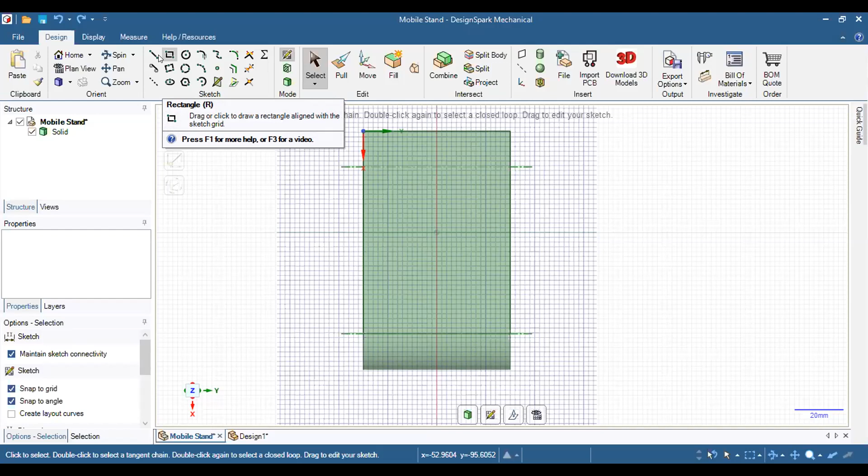Let's move to the circle command. I'll draw a circle at the center of the solid, at the bottom of the solid. You can see the diameter of the circle will appear. In order to freeze this diameter, you have to press the space bar button. You see the mouse is released, the dimension is frozen right now. You have to give the dimension.

It should be 40, because the whole dimension is 60 mm. If I fill in the 40 mm diameter for this circle, 10 mm is left on this side, and 10 mm on this side. If you want to keep more material from this side, you have to reduce the diameter. So now you can see 12.5 mm from this side, and 12.5 mm from this side.

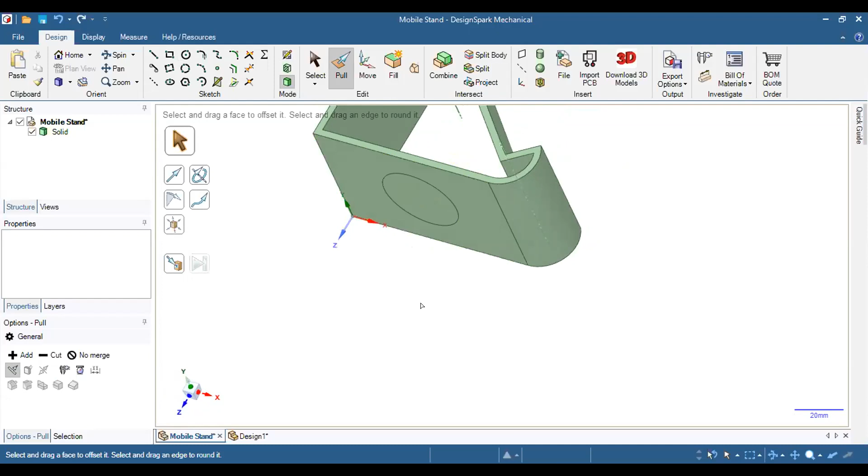Once you are done with the cross section, you have to move into the 3D mode. Once you are in the 3D mode, you have to revolve it like this way, and pan it. Now I just want to remove this material from the solid by selecting the pull command. You have to pull into the negative direction, and it will be removed.

So the cross section of the circle is very small. In order to extend it, you have to undo this command, and redraw the circle in the sketch mode. To repeat this, I'm undoing it. Now I'm in the sketch mode, and I've already selected the circle command.

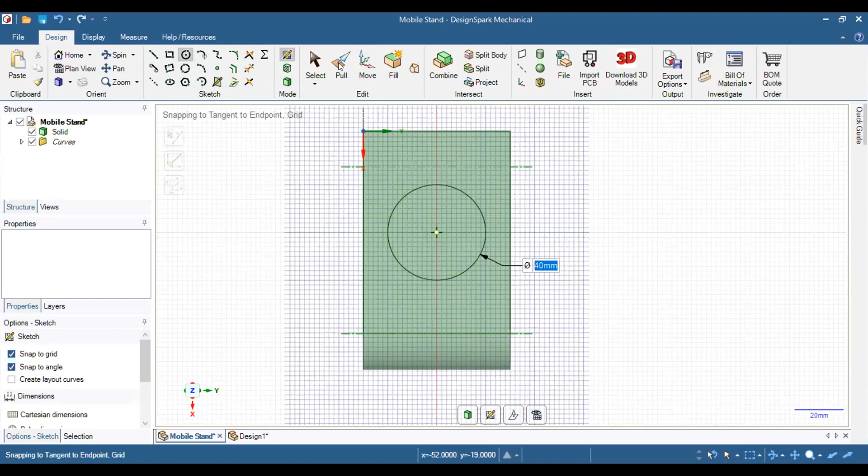In order to draw the circle, the diameter will appear and you have to fill it in. This time I'll put a diameter around 40 mm. Now I'm back in select mode, into the 3D mode. You see the sketch feature is turned off. I'm selecting the pull command in order to remove the material from the solid, moving into the negative direction, and the material will be removed.

This way you can remove the material or make the solid more appropriate according to your requirement. I'm clicking on the home screen and spinning it this way.

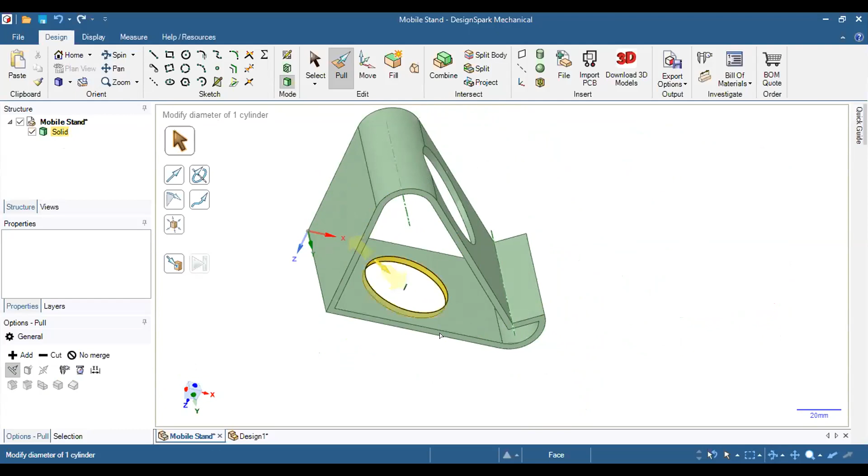So here we are done with this design, but if you want to add some text to it, if you want to put your name on this mobile stand, you can also do that. But you have to select the plane where you want to add your name. You can either convert it into solid, remove from the solid, engrave your name into it, or just emboss it. You have to decide whether you want to add it or subtract it from the solid.

So in order to draw the text right over this solid, you have to move into the sketch mode, but make sure you have selected the right plane. I'm writing on this plane, so I'm going to select this side, or this plane of the solid. Once you have selected this, you have to move into the sketch mode and click on the plan view.

Once you are done with that — right now there's no option available in this tool to type directly over the solid.

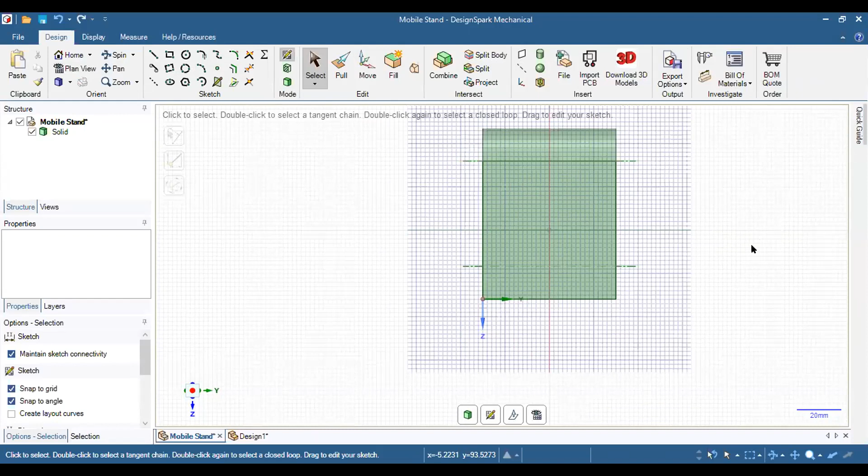So in order to add a text feature into the sketch mode, you have to click on the dimension. Once you have selected this edge or that edge, the dimension will appear. Once the dimension appears, you have to freeze it by clicking the left mouse button. Once it is frozen, you can just double click on it and edit it right now.

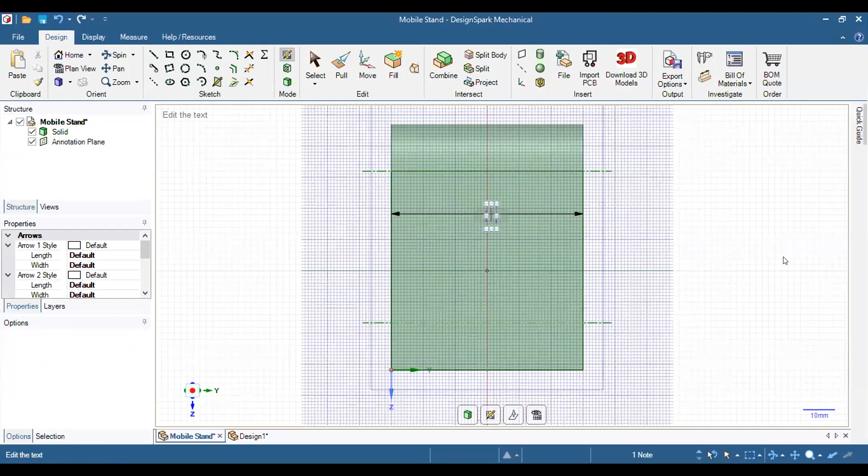In order to put the specific name, you have to press the backspace button to remove the previously set 60 mm. Right now, let's say I'm typing Chitkara.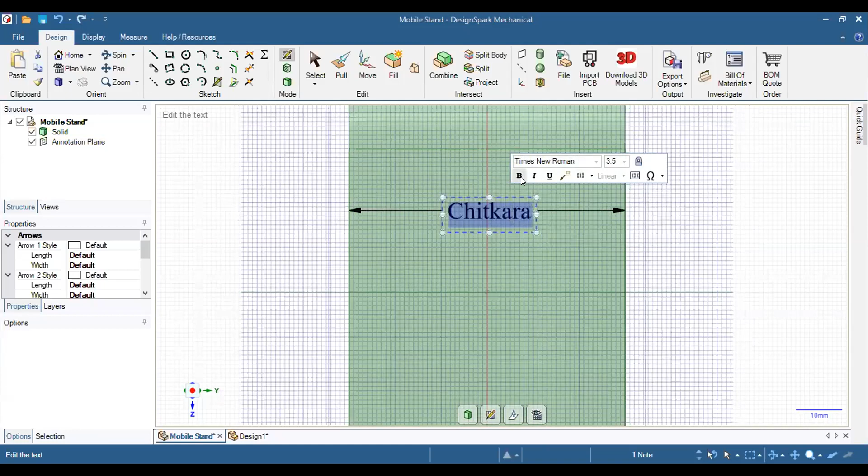Times New Roman. Yeah, here it is. So I'm selecting some bold command and increasing some point system.

I think it should be 5. Once you are done with it, you can see the text is added, but it is not the feature of the sketch mode.

So in order to make it a feature of the sketch mode, you have to select that text by using Control A, or by pressing Shift and moving your arrow button from the keyboard, like we are selecting some folders in the window.

This way you have selected the text, and you have to project it into the sketch mode. To do that, you have to go into Project to Sketch, so whatever is right here will be projected to the plane view, or into the sketch mode.

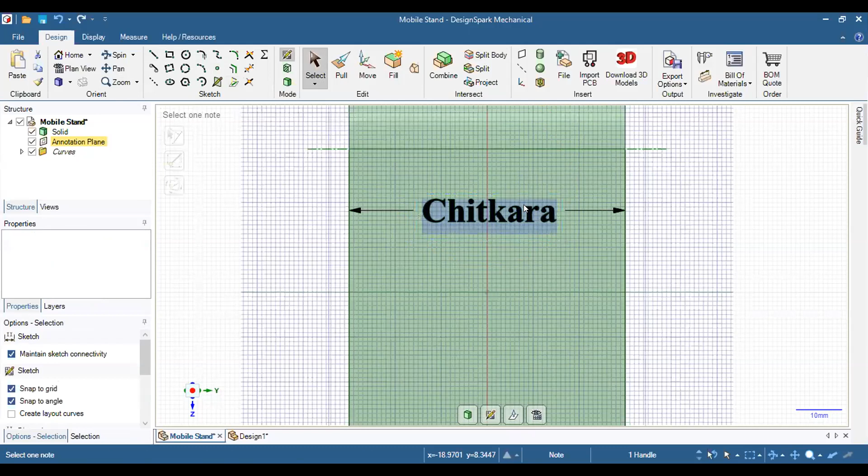Once you select this, the selected feature is projected to the sketch. In order to verify it, you have to select this and delete this. You have to delete this also.

By right clicking, you can see Cut. So it is deleted right now. The sketch is projected, the text is projected to the sketch.

So in order to convert it into 3D, or emboss it, or engrave it from the solid, you have to move into the 3D mode. Here is an option for 3D mode. Once you have selected this, I'm just zooming out.

You can see the drawn sketch is highlighted, as previously when we are moving our mouse onto the drawn sketch, it will be highlighted in yellow color. So similarly right over here, it will indicate the same as a yellow color, so you can select it.

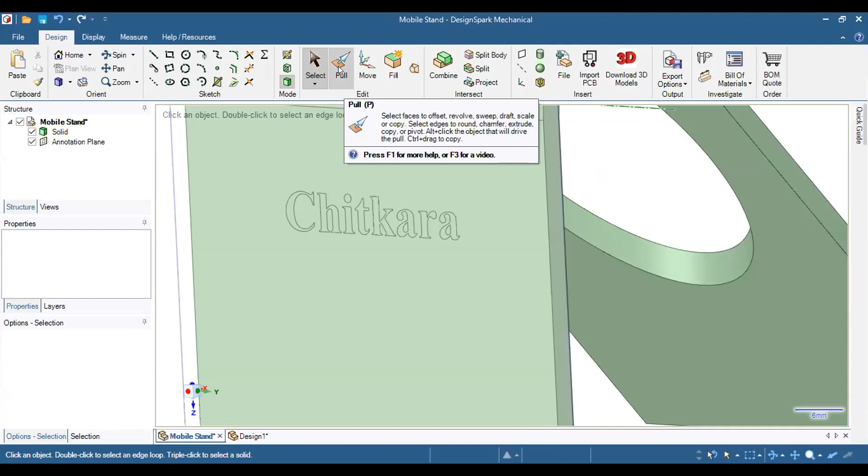There is an option for the Pull command which is off right now. I'm just turning it on by selecting it. Once it is selected, you have to click left click, and you can move into this direction or into this direction.

So it totally depends upon you whether you want to remove the material, or engrave it, or emboss it. It totally depends upon you. But it is very tedious to do this for each plane of the text to emboss or engrave one by one.

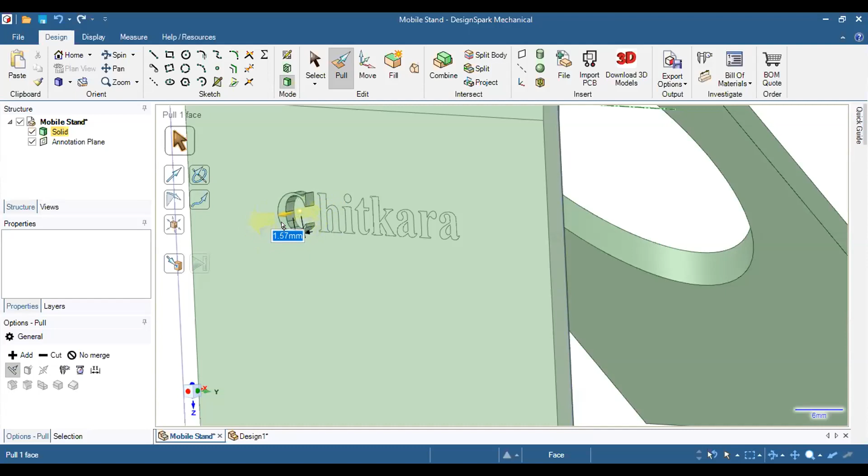In order to do it simultaneously at once, you have to select them multiple times by pressing the Control button. You have to select this, and this, and this, and this, and also select this. The inside of the A, you don't need to select.

So the selected planes of the text will be highlighted in orange, as you can see. I hope it is clearly visible to all. Once it is all selected, you can click the left mouse button and move into the positive direction. The dimension is highlighted, as you can see.

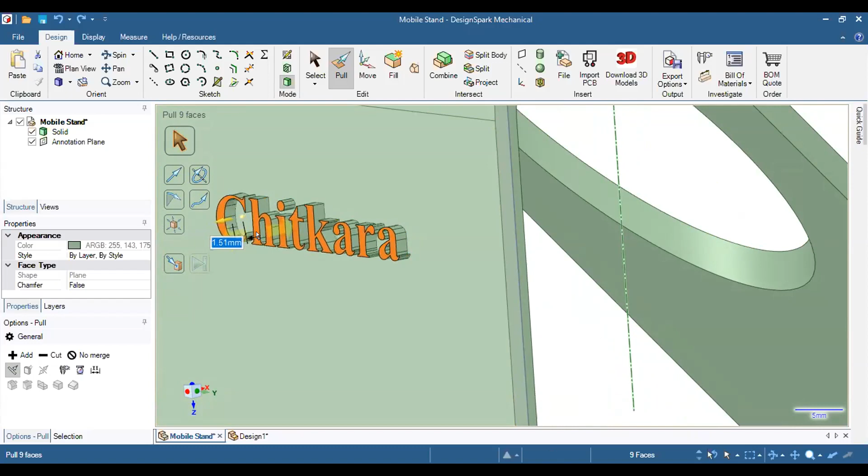You have to freeze that dimension. In order to freeze it, you press the spacebar button and give the dimension. I think 2 mm is enough. Once you press Enter, it takes some processing, and the text will be highlighted.

So this way you can also add text onto the solid, though it is a hit and trial method using the dimension feature, since there's not a particular text option available right here. You just have to select the dimension, then delete the dimension, put your name right here, and fill it in, Chitkara.

Once you have filled that text, you have to project it onto the perpendicular plane. Once you are done with this, you have to select all the drawn sketch and convert it into the solid by using the Pull command.

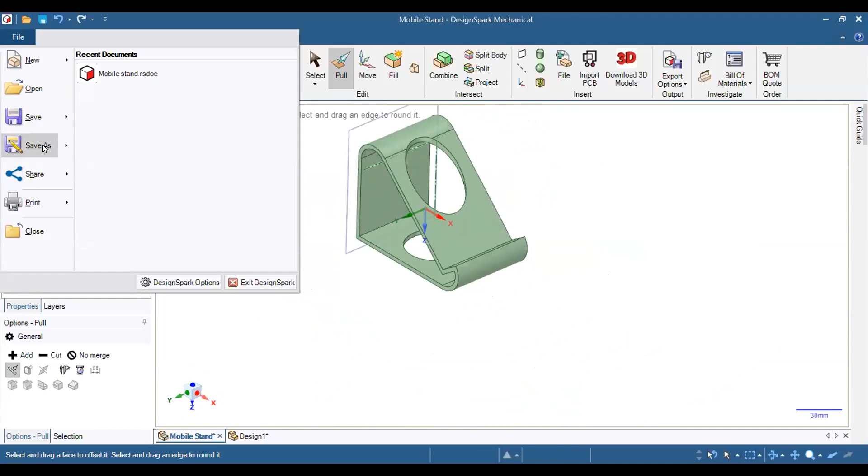So we are almost done with this design. In order to save this design, you have to go into File, and you can see here is a Save option or a Save As option. If you want to save as, click over the Save As option. You have to select the required directory where you want to save.

Right now I'm making a new folder, 'design', and opening it. The name will be selected as we have given to the solid previously, it is a mobile stand. If you want, you can also rename it right here, but I just want to save it first into the D directory as a design in the design folder. So you can verify it into the directory, and the design will be saved.

Let me show you, I'm going to shift my screen. Let me shift my screen.

Here it is, I hope you can see the directory. So here is the design folder which has been created, and see the design file. The extension of the file is rsdoc file. You can also double click right here in order to open that design, but it is already opened. So let me shift to the Design Spark Mechanical Tools.

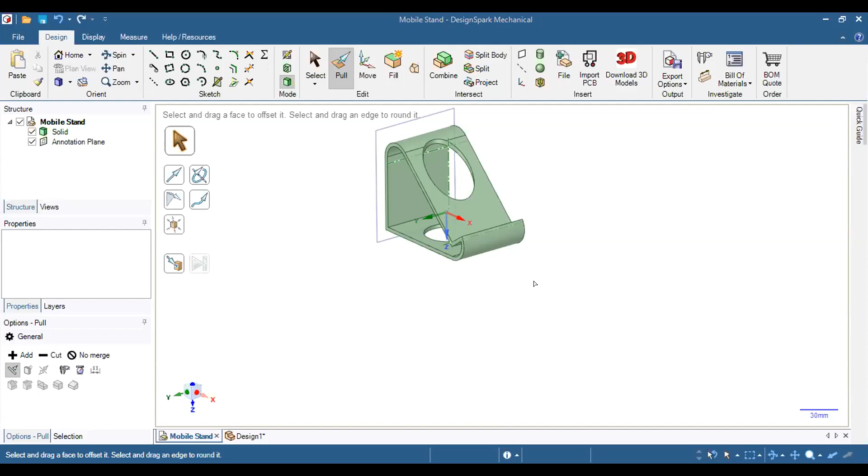Since we don't have enough time, do you have your video ready which we recorded? Yeah, I have a video ready. Okay, so what I can suggest is we can quickly show them the video. Let us not explain anything at this stage because we don't have that much time now. We can just quickly show the video. Maybe you can introduce the 3D printer, how it works and all those things. Then we can take a couple of questions and feedback if people have, so that we can improve our flow over the next 3-4 days.

For the nitty-gritties, for the audience, I would like to say, saving the STL file is the first step for 3D printing. Then there are so many other things associated with it, the STL file needs to be imported into another software where you need to optimize for a particular 3D printer, and then you have to consider so many things. Those things I suggest we can cover over the period of these 4 days, where for different designs you can introduce different things regarding 3D printing.

Yes, yeah, so today we can simply show them a video and introduce the 3D printer, and other things related to it, how to convert those STL files into files which can be imported into the 3D printer for printing. That we can do tomorrow and over the period of these 4 days. So you can show the video, and in between you can pause it where you want to explain a particular point, but I suggest you wrap it up in 5 minutes max for this video part. Okay, thank you sir.

This is a Praman printer with a build volume of 500 by 500 mm, and in that direction it is also 500 mm. It is a dual nozzle printer, so you can print in dual color. Let me play this video and see.

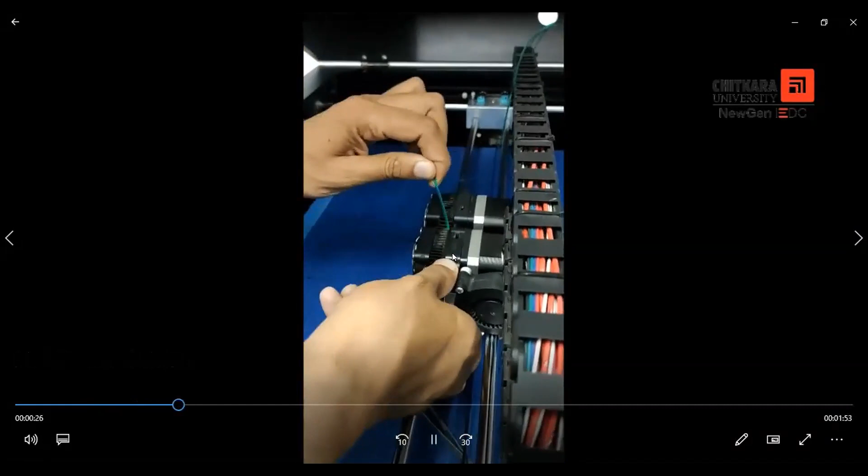So you have to clip it this way, or if it is not that smooth, you have to clip the other end. This highlighted part is the first extruder of the printer. You have to press the extruder this way, and insert the material.

Once it is inserted, you can see on the control button, I'm going to insert the SD card. In the SD card, the printer software converts the STL file into the G code, into the coordinate system. So the printer understands the G code system, and it will print the designed model accordingly.

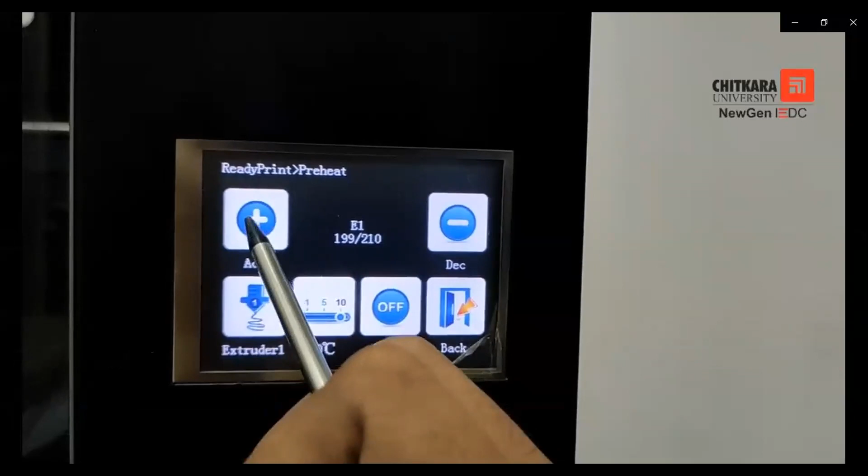Let me go back here. Here I have extruder 1 selected. I have defined the temperature of extruder 1 by adding it - for PLA material it should be 210. For extruder 2, I turned it off because right now it has no material, and the heat bed is also turned off.

Once you are done with this, you have to go to the printing option. Here you have to select the file. I have renamed it as Design2.g code. Once you have selected this, and the temperature matches 210 by 210 to the extruder temperature, the printing will start. Here you can see the shape that we designed in the software has started printing.

It is a very initial stage. You have to make very clear that all the starting layers of the 3D printer filament are joined together to the base.

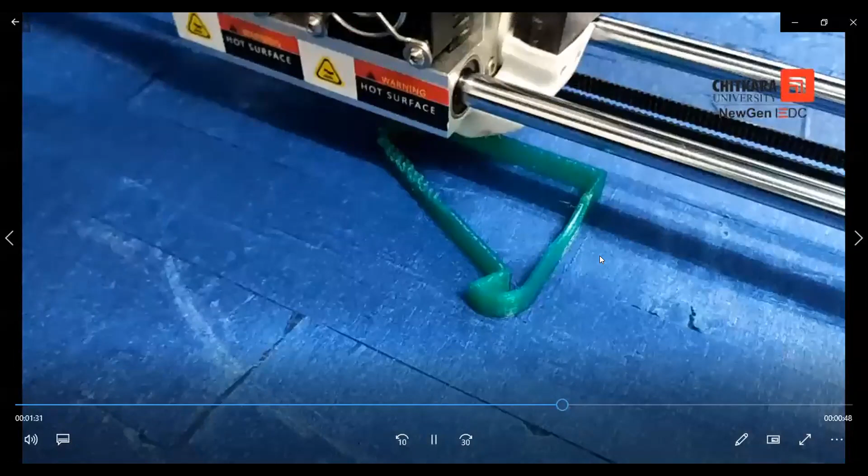So this is almost 20% of the mobile stand printing, and it will show some 30 to 35... actually it's 45, 35%.

So it is totally completed right now, near about 90 to 95%, and will be completed within a few minutes. Once it is completed, you can see the design. The file shows 100%, and you just have to press the back button from the control panel. So this is it. Over to you, sir.

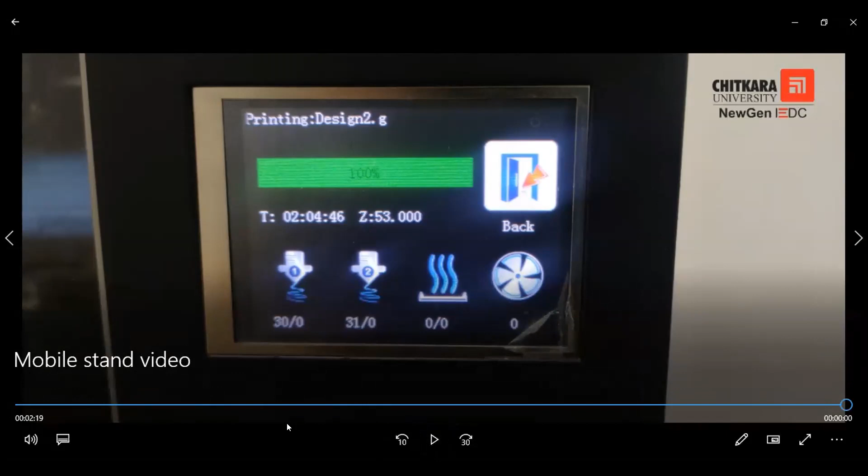Lipika Gupta will do the different views of designs. We are going to do like 5 designs, so we will show different things with different designs. In this particular design, tomorrow morning we can start there - we can show how to make different views of this design and save it as a JPG or PNG file. Anybody else has any question?